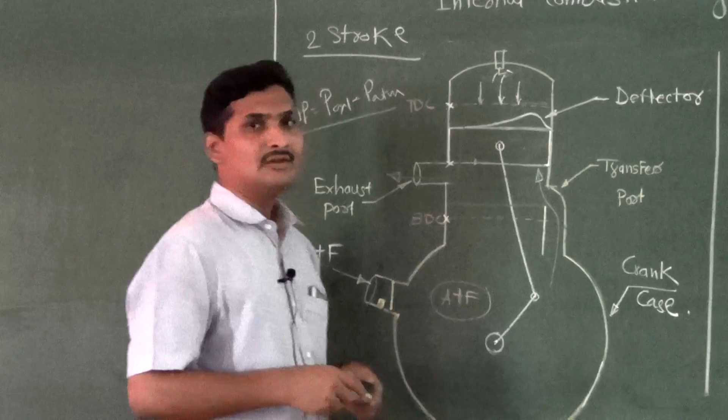So here, as I told you, the pressure difference exists. Pressure here is high, pressure here will be low. Once it uncovers, this charge will come here.

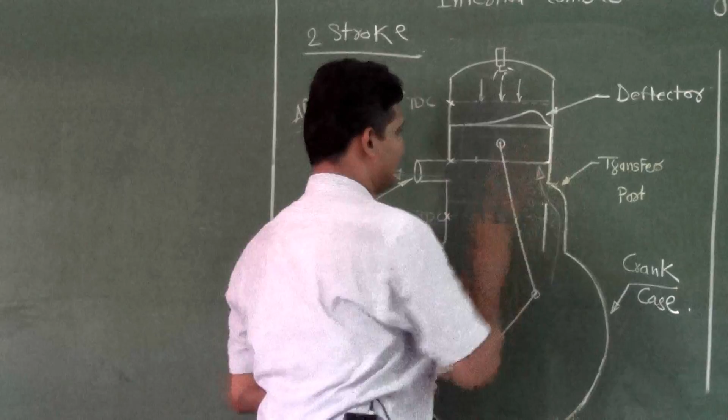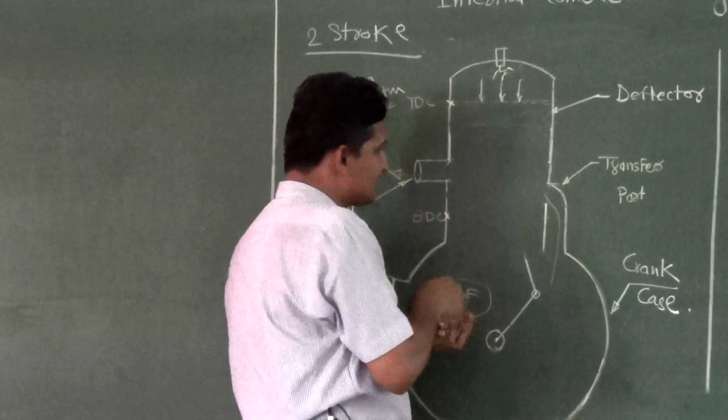Now, if I draw the position of the piston like this, let's consider that the position of the piston is somewhere here, which has uncovered the transfer port. The deflector is this one, so this is the top of the piston.

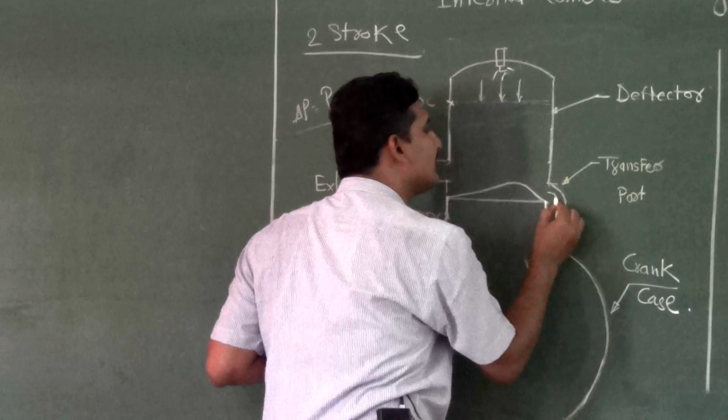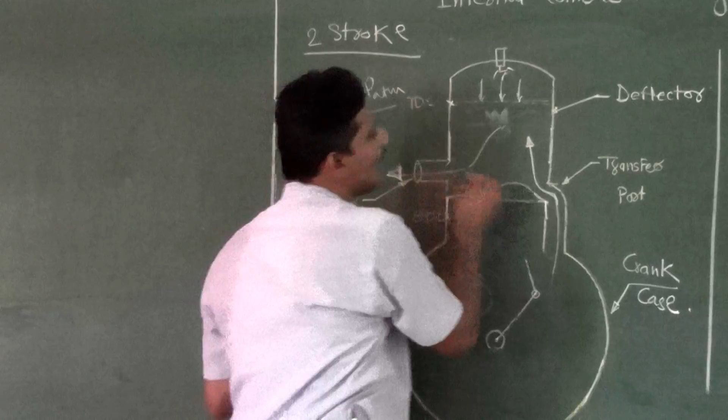When fresh charge is coming like this, it doesn't move horizontally, because of the deflector present, it will move up. In this zone there will be exhaust gases, so exhaust gases get pushed forward, and the fresh charge will occupy this particular space.

Now piston has reached BDC. So what has happened when the piston is traveling from TDC to BDC?

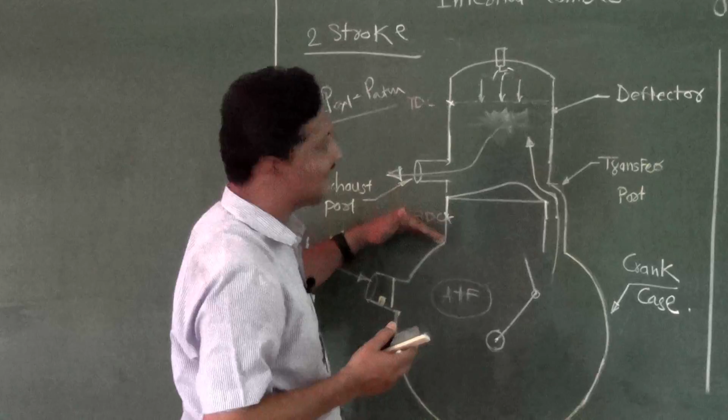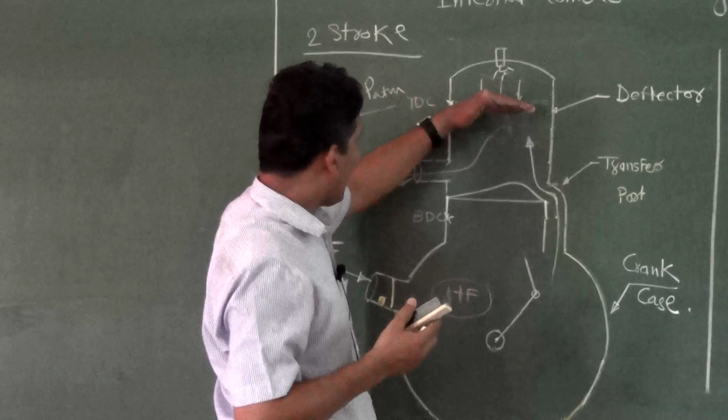The spark has occurred. Because of the occurrence of spark, high pressure is generated. Because of high pressure generation, the piston moves in the downside direction. As it moves downward up to the exhaust port, it is acting as a closed chamber. Once it uncovers the exhaust port, all exhaust gases move out.

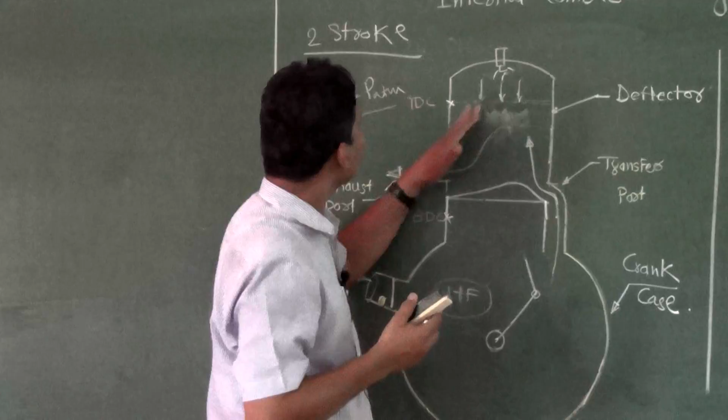Once it uncovers the transfer port, the charge present on the downside, air plus fuel, will come up and occupy the upper space.

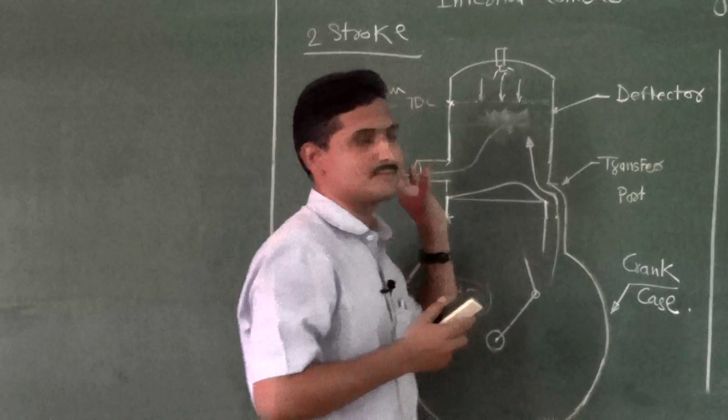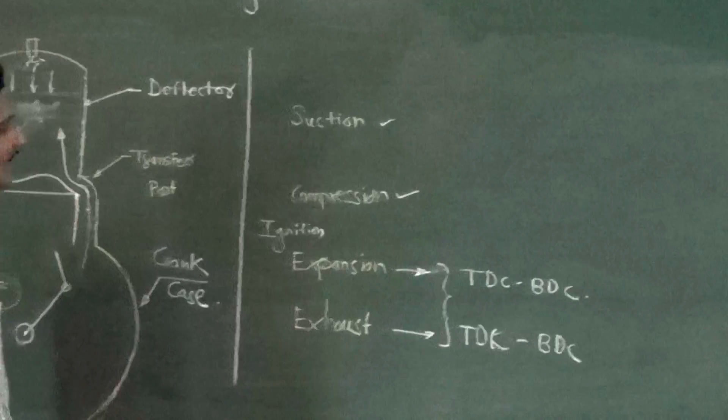So expansion and exhaust both occur when the piston is moving from TDC to BDC. For the exhaust also, the piston is moving from TDC to BDC. So these two processes, expansion and exhaust, both take place when the piston moves from TDC to BDC. For completing these two processes, I require one stroke, from TDC to BDC.

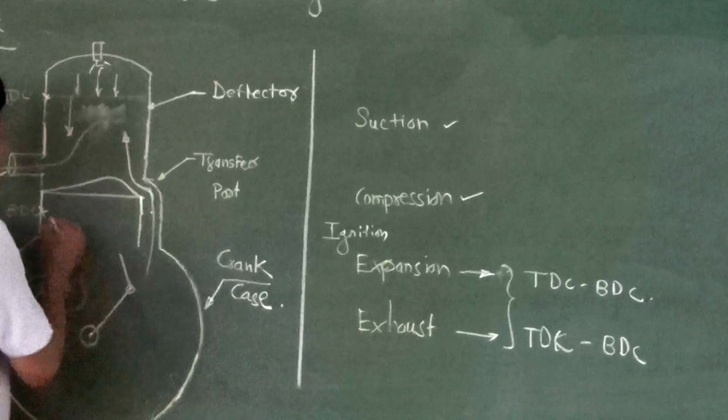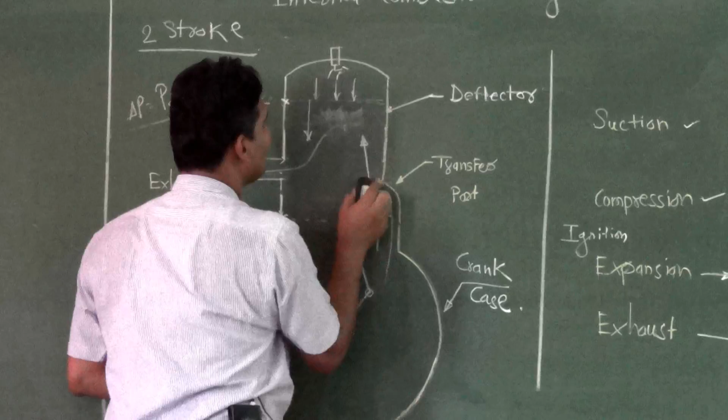Now let's assume the piston is at BDC and it starts moving upward. While moving upward, first it will cover the transfer port, then it will cover the exhaust port.

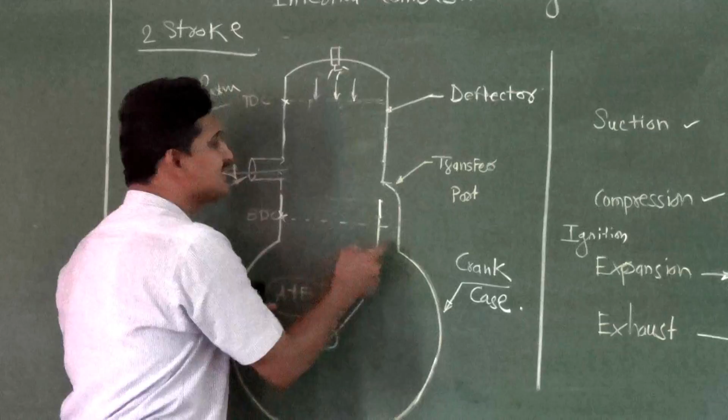What is above the piston? Above the piston is air plus fuel, which has entered from the transfer port. First it will cover the transfer port, then it will cover the exhaust port.

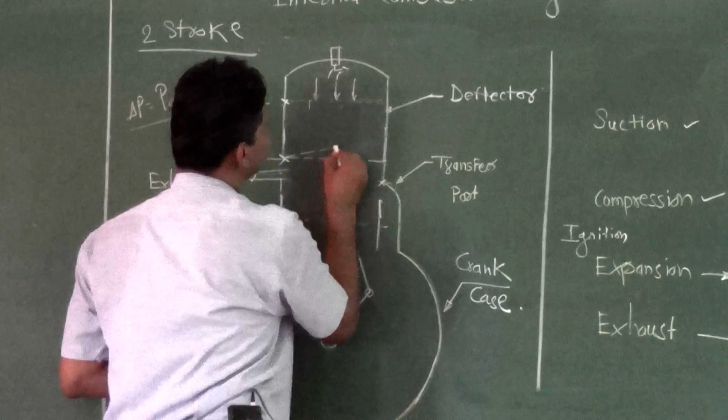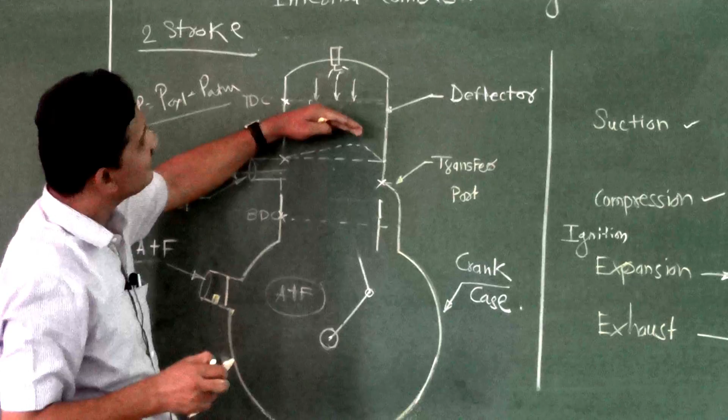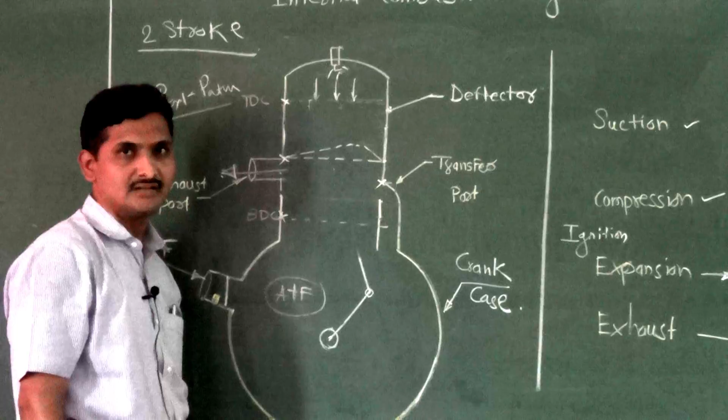Once it covers both, and when the piston is moving upward, this has formed a closed chamber. In a closed chamber, if the piston moves upward, the process that takes place is compression, because we are reducing volume, and because of that the pressure increases. So as the piston moves upward, compression occurs above the piston.

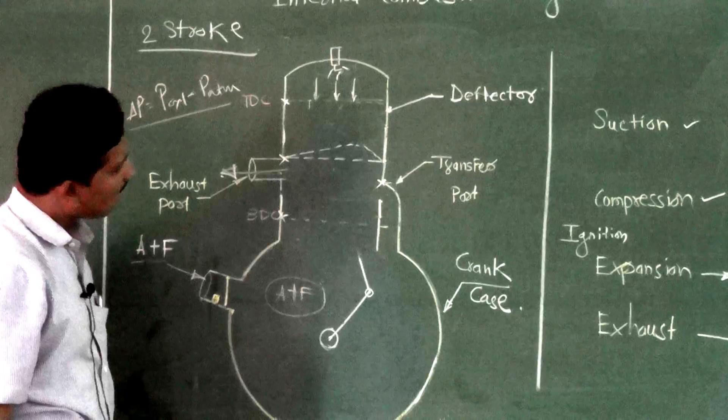What happens below the piston? On the downside, when the piston moves upward, the space below the piston increases, and as that space increases, what is generated is vacuum.

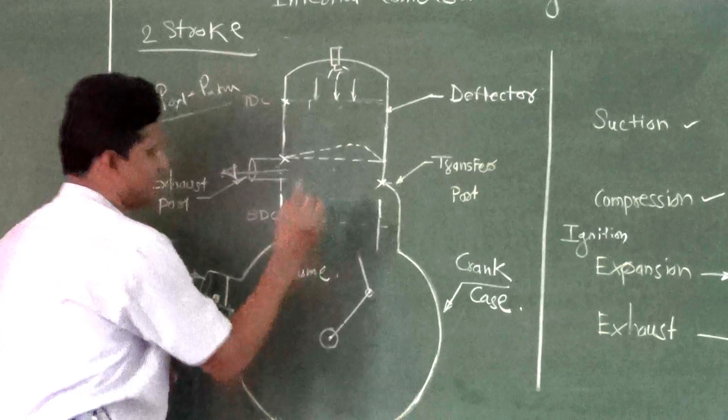So in the crankcase, vacuum is there, and outside is atmospheric pressure. Because of this pressure difference, here is vacuum, here is atmospheric pressure. Atmospheric pressure is more than vacuum, as we know.

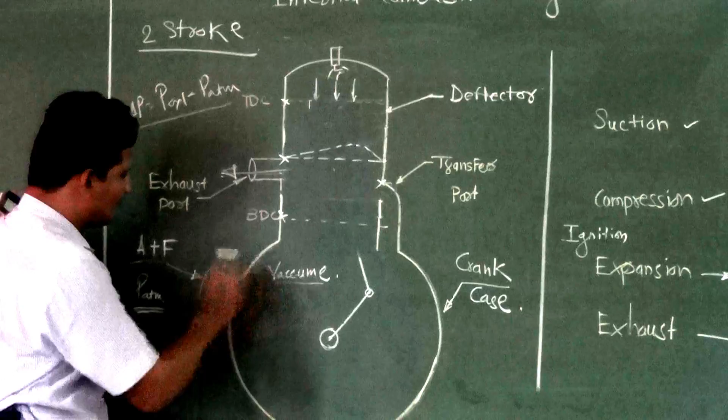Because of this pressure difference, the valve present here will get open, which is a pressure-operated valve, working on pressure difference. So if pressure on this side is more, it will open on the inner side.

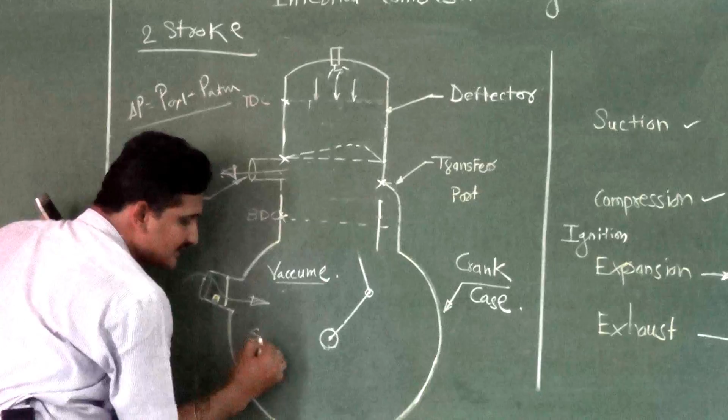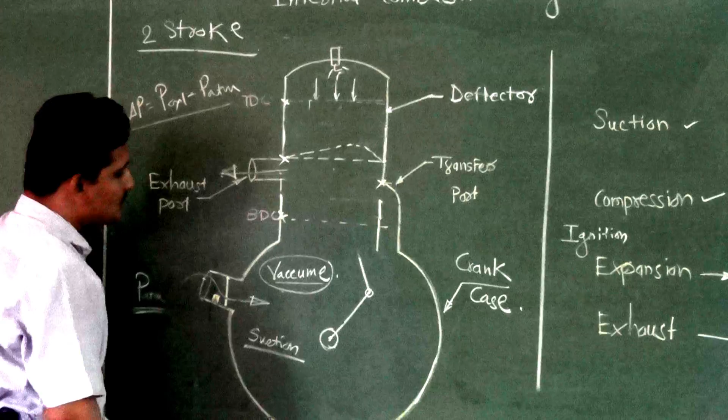So once it opens on the inner side, the fresh charge will come inside. Remember, above the piston compression is happening, below the piston suction is happening. This is suction because outside charge enters the system due to the vacuum generated. So the charge has come inside below the piston, and above the piston compression has occurred. So two processes complete: compression and suction.

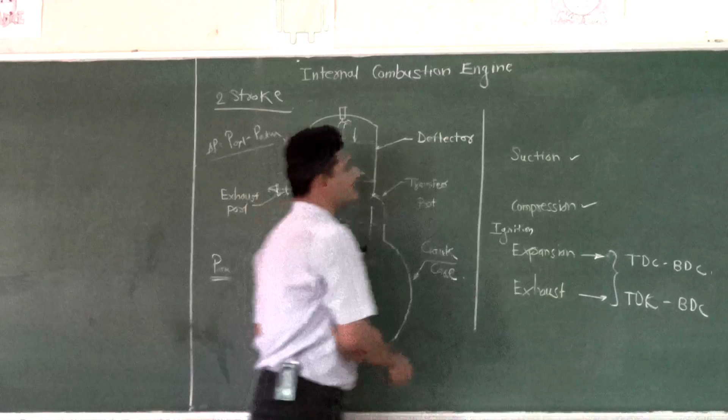So I'll note here suction and compression. In these two processes, the piston has moved from BDC to TDC.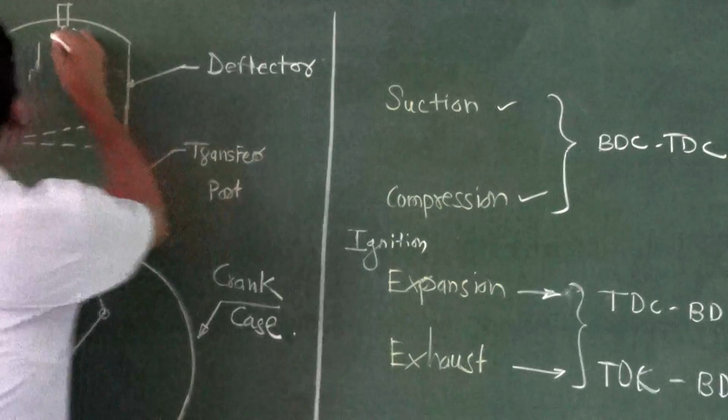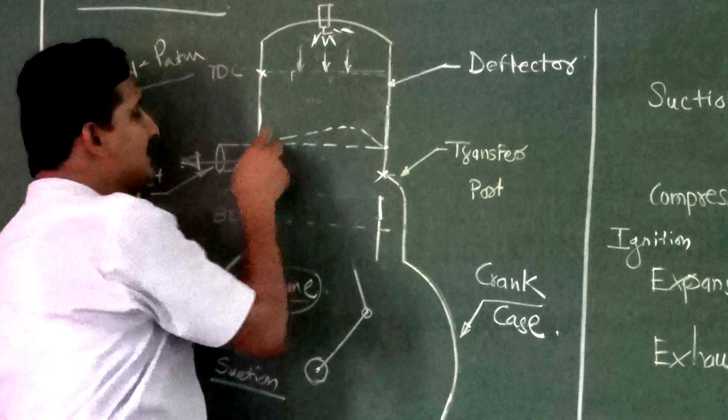Once the piston reaches TDC, once again spark will occur, and as spark occurs, pressure is generated. As pressure is generated, the piston starts moving downward. As it moves down, first it uncovers the exhaust port, so all exhaust gas goes outside. Then it uncovers the transfer port, and fresh charge, air plus fuel, enters above the piston.

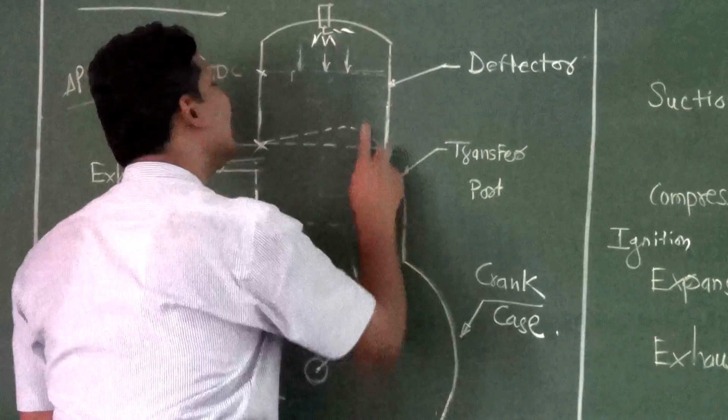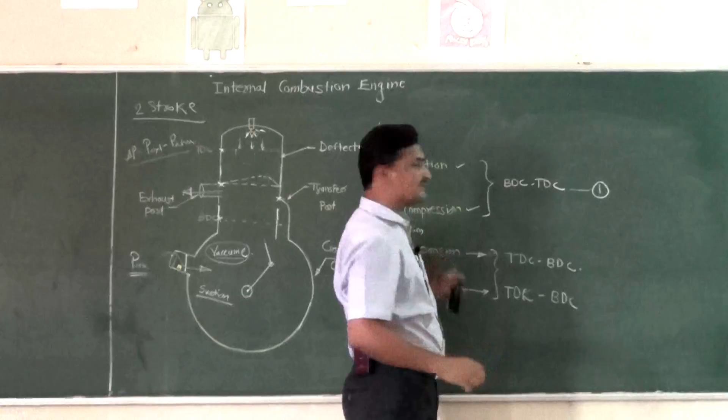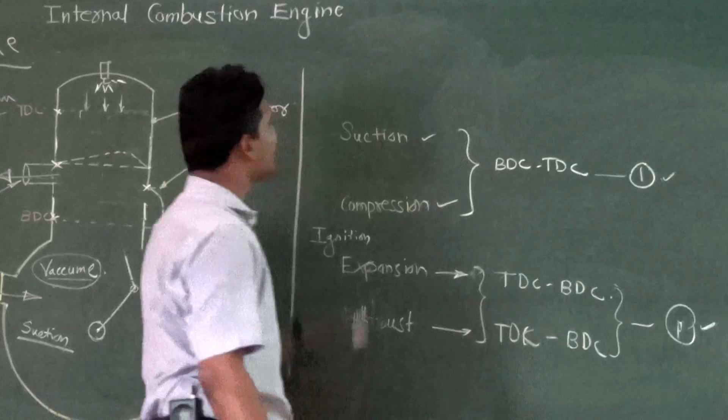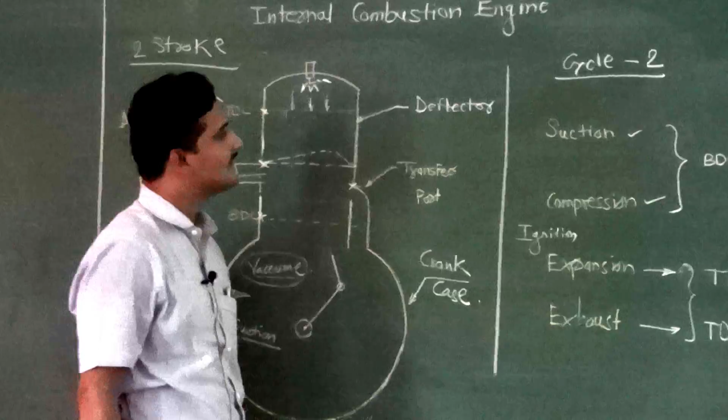So for completing suction and compression, we required one stroke. For completing expansion and exhaust, we required another stroke. So how many strokes do we require? We required 2 strokes - this is one stroke and this is another stroke. For completing 4 processes, that is nothing but 1 cycle. So for 1 cycle, we required 2 strokes of the piston, and that's why this engine is called a 2-stroke engine.

Now, as I told you, there is a deflector provided over the piston. What is the function of the deflector? Let's consider the piston is present here and the deflector is on this side. If the deflector is not provided, the fresh charge may come like this, enter like this, and go out from the exhaust port, causing wastage of fuel.

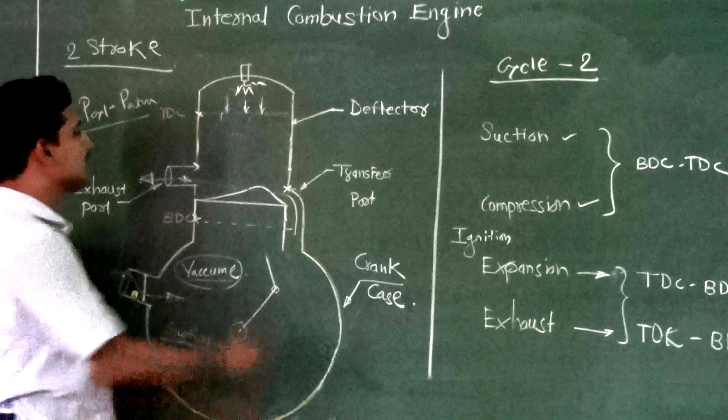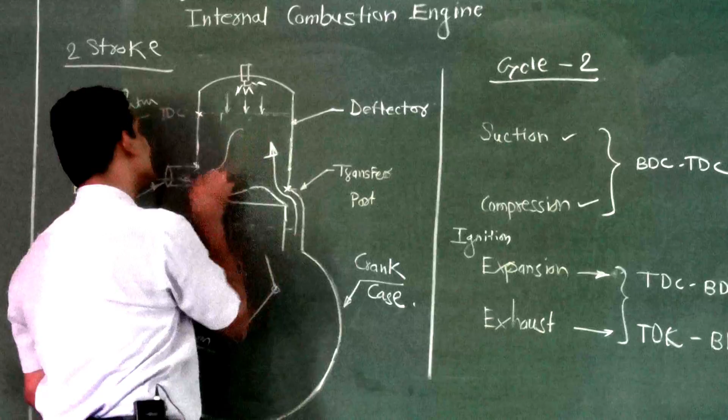If the deflector is present, then the charge will move in the upward direction, pushing the exhaust gases forward. So wastage of fuel will get reduced, and that's why we have a deflector on the piston for the 2-stroke engine. For the 4-stroke, we have a separate stroke for the exhaust process, and that's why the deflector is not required there. That is the specialty in this case.

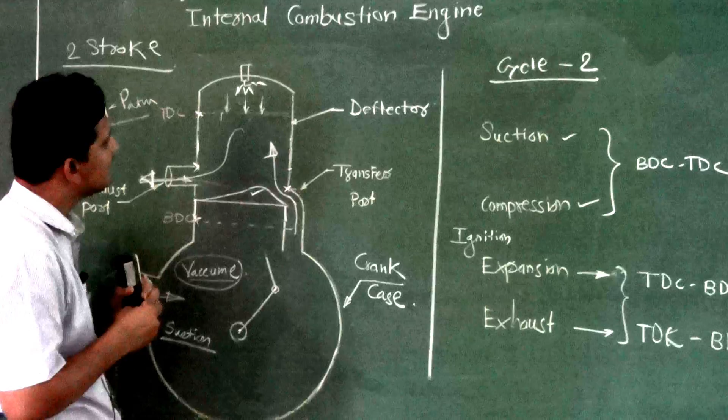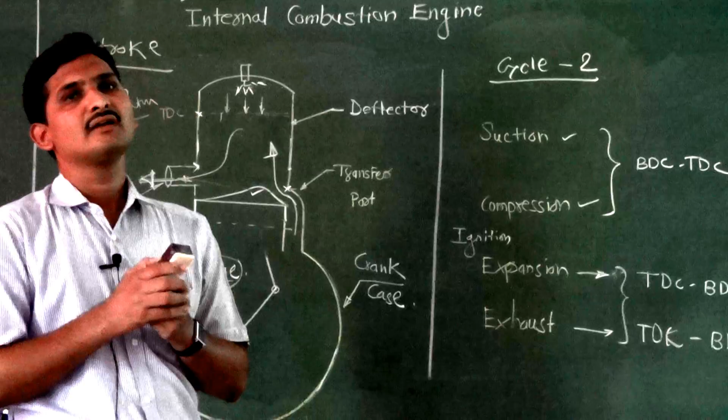Now, advantages of the 2-stroke engine: if you observe carefully, in a 2-stroke engine, power output for the same size of engine is more. At the same time, bulk of the engine is less. So weight of the 2-stroke engine will be less for the same power output. These are 2 major advantages.

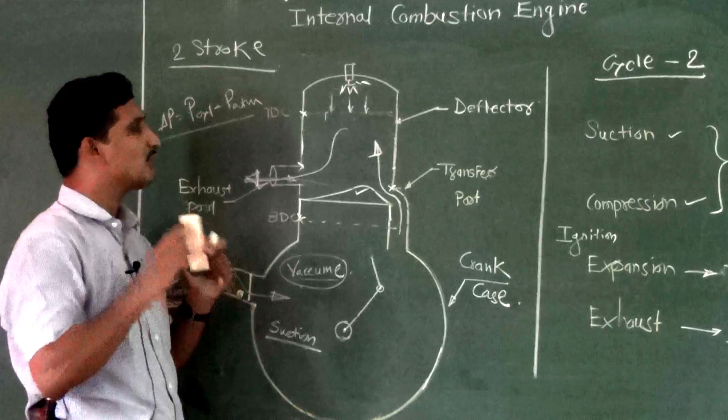Whereas disadvantages, if you consider: thermal efficiency is less because there is wastage of fuel, as we have seen. Next disadvantage, there is a scavenging problem. What is scavenging? Removing exhaust gases from the engine - that process is called scavenging. Removing exhaust gases from the engine is quite difficult here because we are not providing a separate stroke. In a 4-stroke engine, we provided a separate stroke, so that was easy there. Here it's a combined process, so removing all the exhaust gases becomes quite difficult. These are some advantages and disadvantages of the 2-stroke engine.

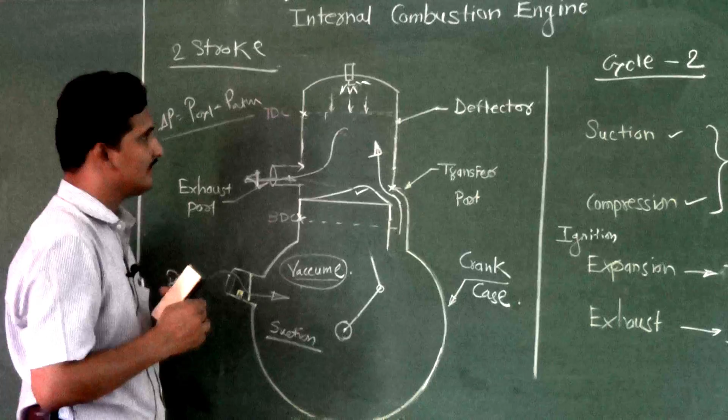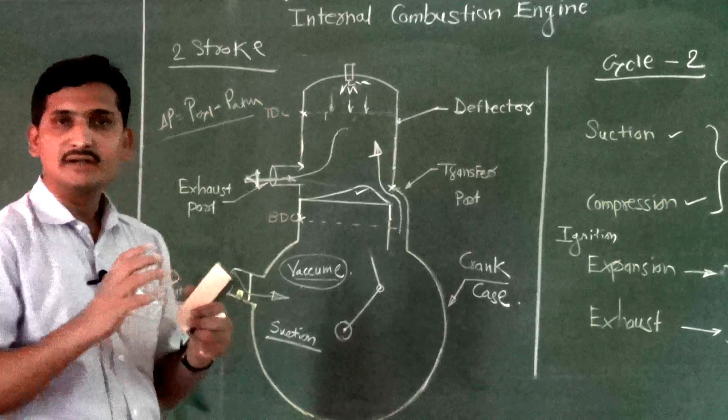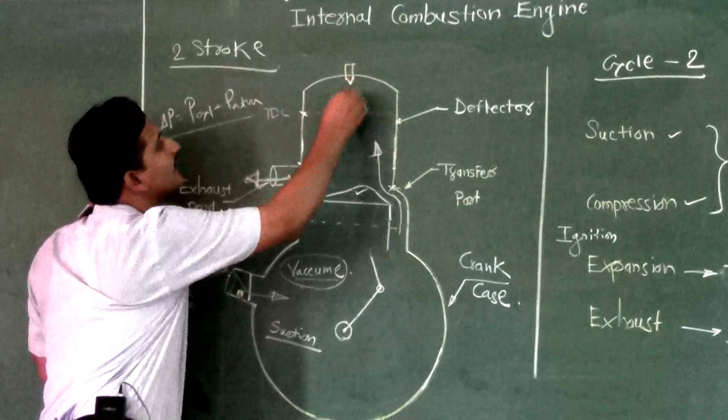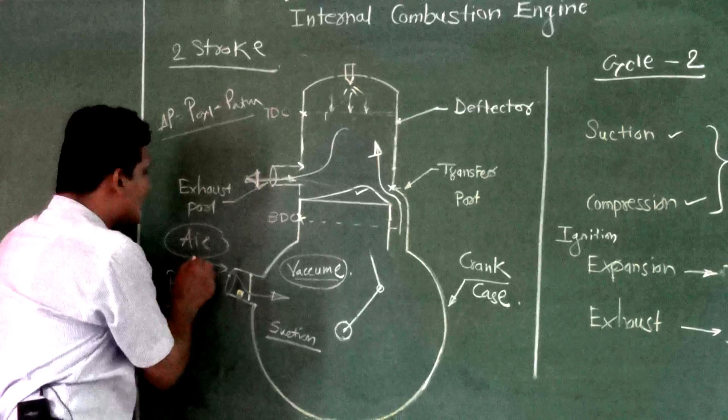Now, till now we have discussed a 2-stroke petrol engine. If I make it a 2-stroke diesel engine, what will happen? In a 2-stroke diesel engine, this spark plug will be replaced by a fuel injector, whereas at the inlet only air will come - there will not be fuel. Where will fuel be added into the air? Fuel will be added into the air after compression. That's the difference - 2 differences: one is we will use a fuel injector, another is that rather than air and fuel coming together, only air will enter the system.

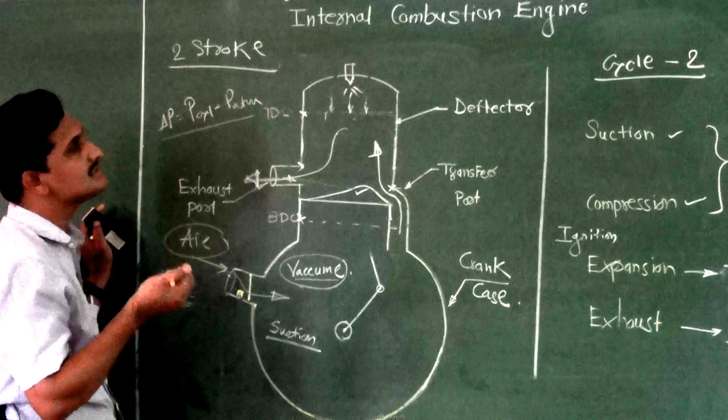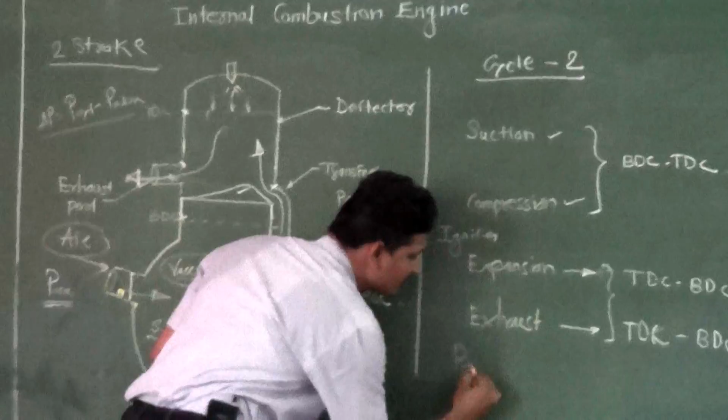There are some advantages and disadvantages. We find application of the 2-stroke engine where power to weight ratio required is more. What is power to weight ratio? It is nothing but the ratio of power produced by the engine to the weight of the engine. If I want power to weight ratio high, then generally we prefer the 2-stroke engine. That is the case.